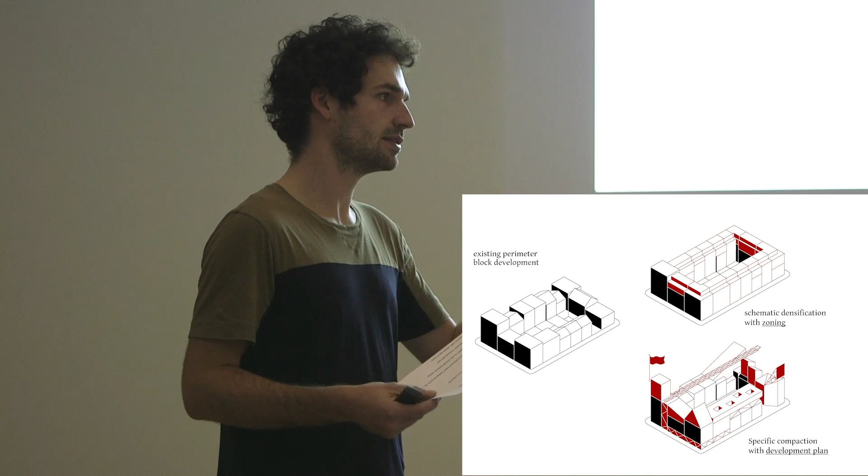So one way to change that is just to build more apartments. So to re-densify the city, or to densify, because Basel is more or less built. We have these industrial areas which are coming, which are also shown at the Dichtelust exhibition, Lysbüchel, Klybeck, Dreispitz. But in like 15, 20 years, when they all will be transformed, and there will be apartments and offices, then what rests is this quite heterogeneous structure in Basel of the Gründerzeit and also later on. And there at the moment what we do is zoning up.

So nowadays this would be, for example, a zone 4, so you can build 4 floors, and then the political way is to say this becomes zone 5, so all the owners can build 1 more floor. But my position is that, first, it won't be like this, because there are different owners and maybe one will do it and the other not.

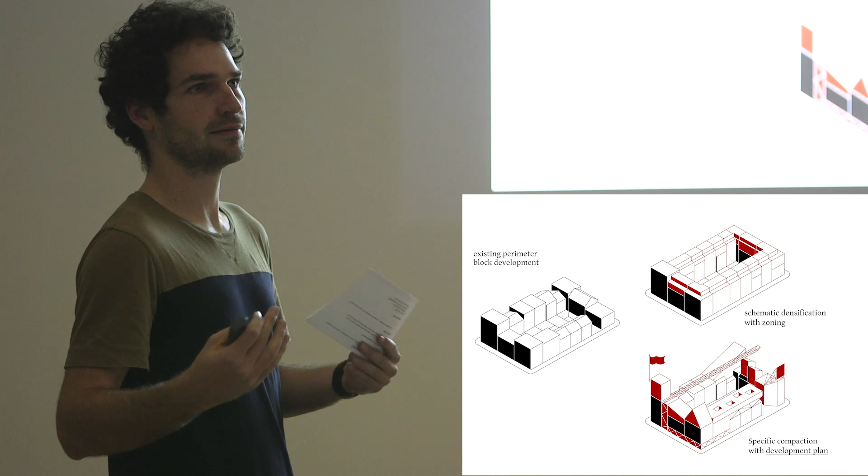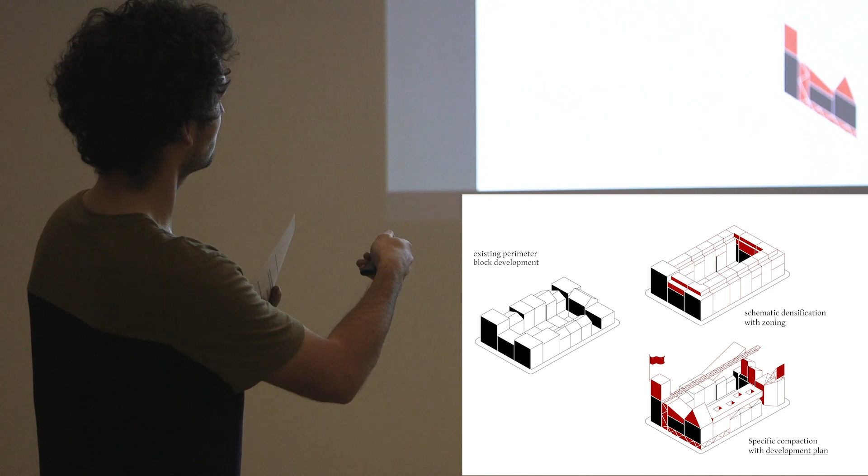And the other thing is that it does not really help the public space. So it does not bring quality. It's just densifying, more volume and more apartments, but no one cares about the quality of, especially, the courtyard. We will talk about this later in my project. Maybe the street part, yes, and also the program. It's about the quality of space, but also of the program.

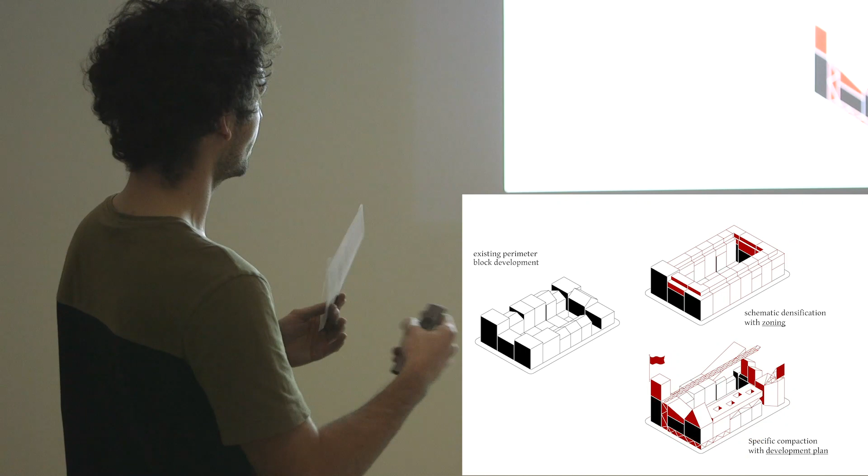And my thesis was to say we need, for this case, specific development plans, Bebauungspläne, where we can also have a higher density if we want, if it makes sense, and where we really can find specific solutions, specific compaction.

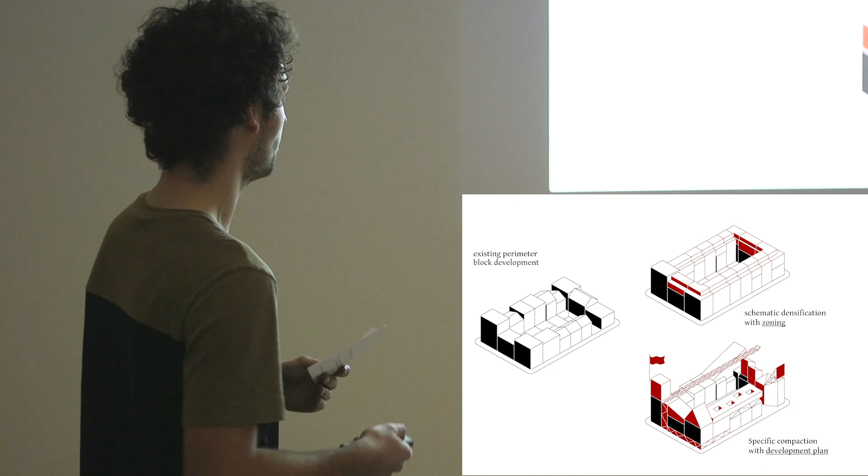Then the other thing I found out, or where I think it's an important point to think about, is the question of affordable housing, affordable apartments. And nowadays, I think it's not really possible anymore to build affordable houses in Switzerland, or it's very, very hard. It starts with the prices for the land, which are also increasing extremely.

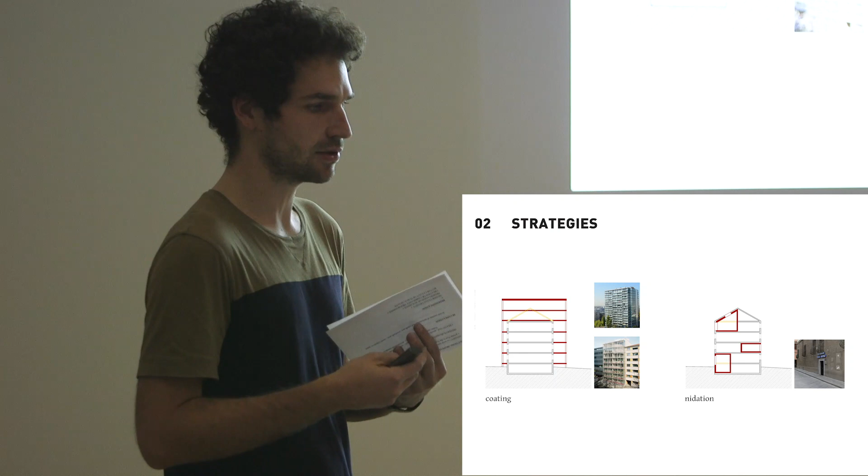So it's much easier to keep, let's say, develop in a more sensitive way the existing affordable apartments. That's much easier. So we really should care about this. And there are different strategies. We know this from Lacaton Vassal, this coating.

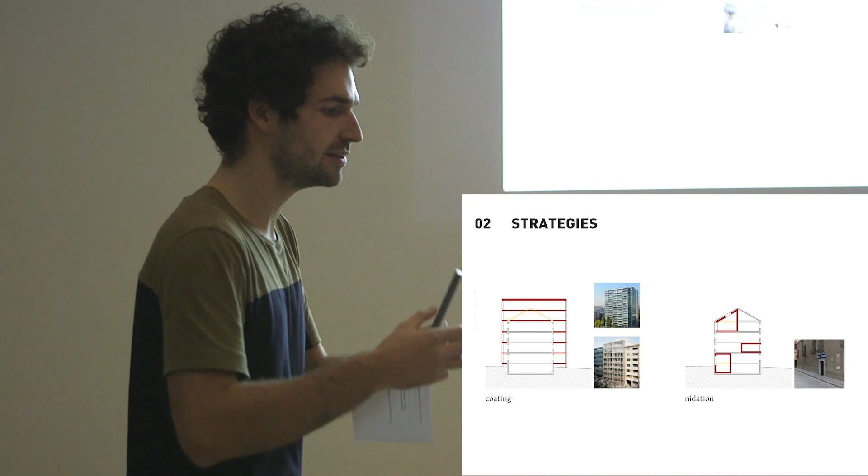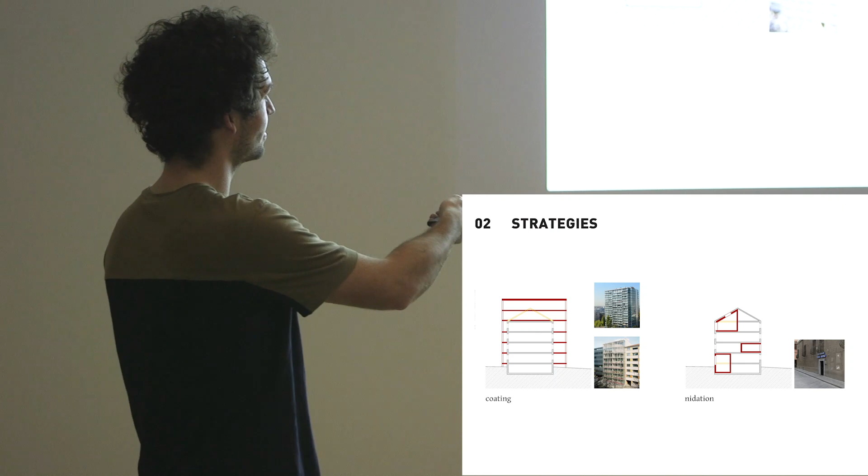So just taking an existing structure and, with very simple construction, maybe also with new floors on top, bringing there more surface. Then a more special situation is this nidation, where you use an existing house or structure and put inside a new program or a new space. This example is from Florence, from Firenze. It's an old Renaissance palazzo, and in the base you have this tiny restaurant in this impressive palazzo.

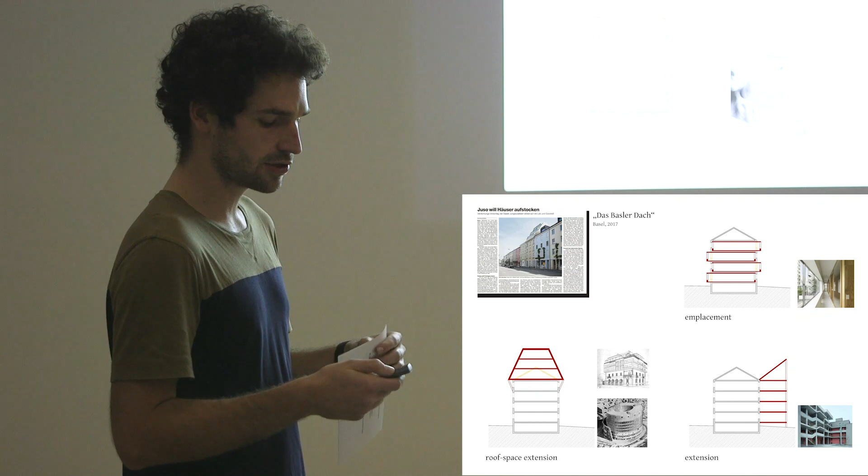Then the emplacement, so taking an existing structure, for example an industrial structure, and bringing in new boxes. This is from Tokyo, a shared house in an old garage actually, where they just put wooden boxes, and it became a share house for students or young people. So a very simple strategy: using a structure just as a shelf and putting in new uses and spaces.

And the other is also a very classic strategy, just the extension, which is much easier, since the structural impact of a roof space extension is much bigger, and in Basel we have the problem of earthquake danger. So this can also be a simple and easy strategy. This is the Kraftwerk in Zurich, where they did an extension of a building of the 60s with very interesting cluster apartments, quite innovative.

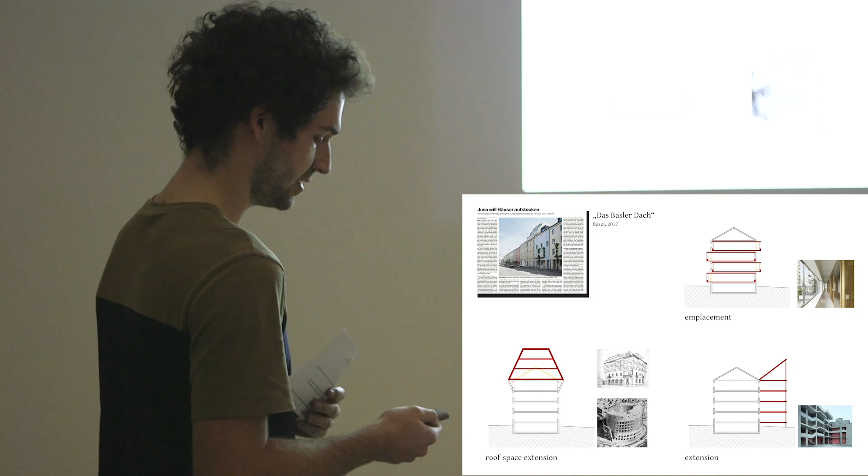So we come to this area I chose for my study. I really had a variety of different plots in Basel which I thought were interesting. I was at the city model and really just checked all the blocks and thought which could be interesting. And in the end, I chose this one.

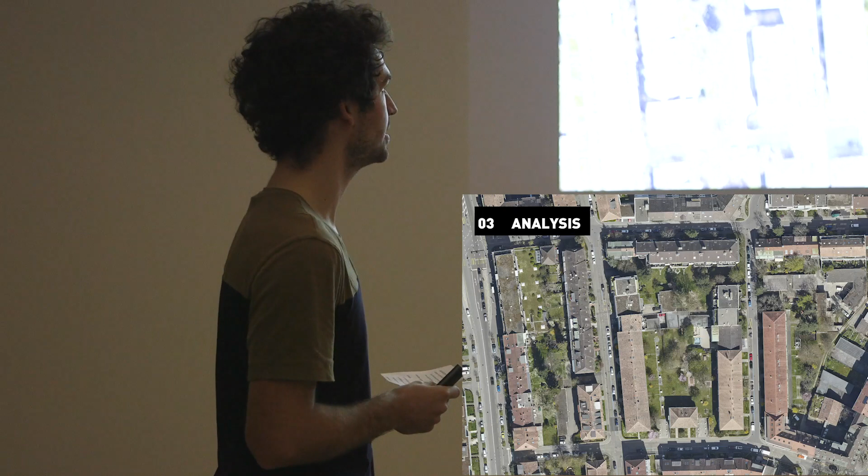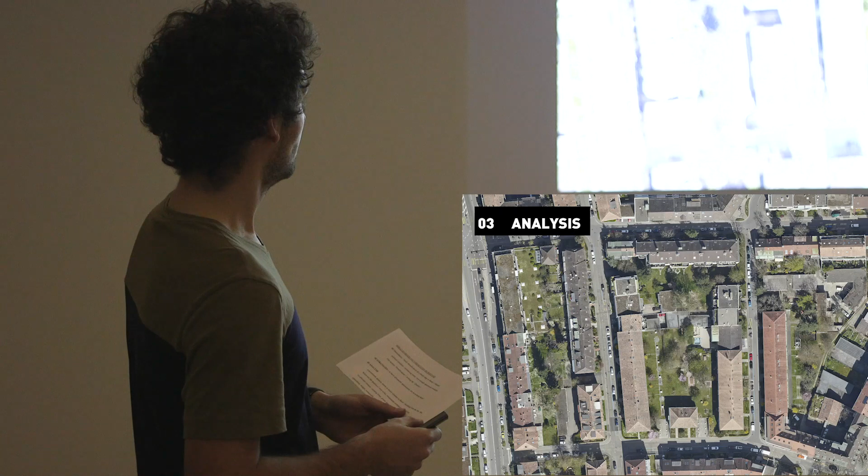It's in the Iselin Quartier. So north of it is the Felix Platter Spital, and it's an area where most of the buildings were built after World War II, in the 40s or 50s. So there are actually no historic buildings, and it's more or less built between the 40s and the 70s.

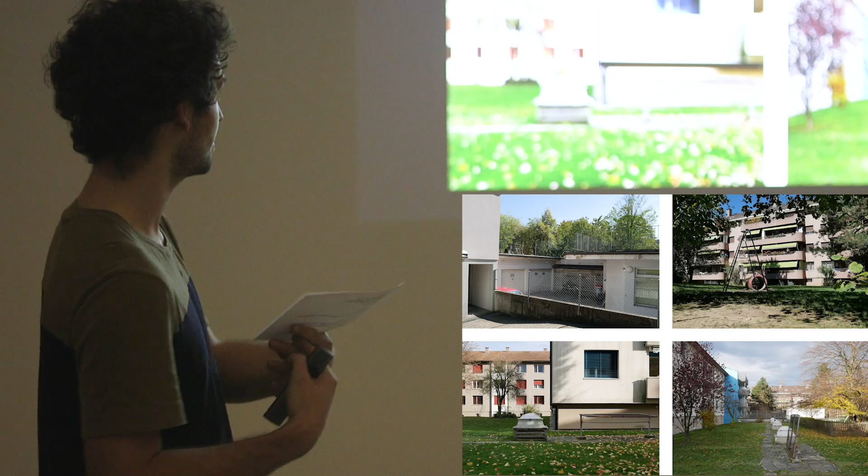It's very solid. And as you see here, there is no street life. The public spaces are more or less dead. But there are qualities, and my first approach was really to find the qualities in this. And there are a lot of qualities: the architecture, which is very solid, and also the trees, the green spaces. But the program does not really fit to the space, and I think it's also not dense enough to have more public life or more activities in the ground floor, for example. But I found quite soon that there is a lot of potential.

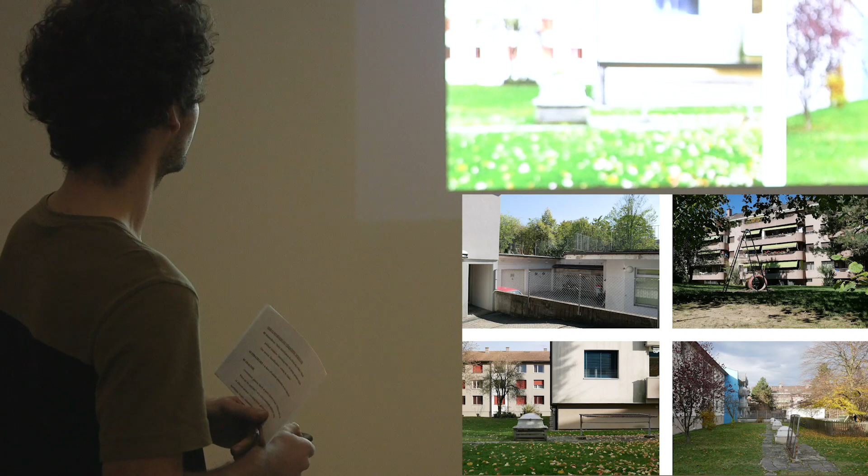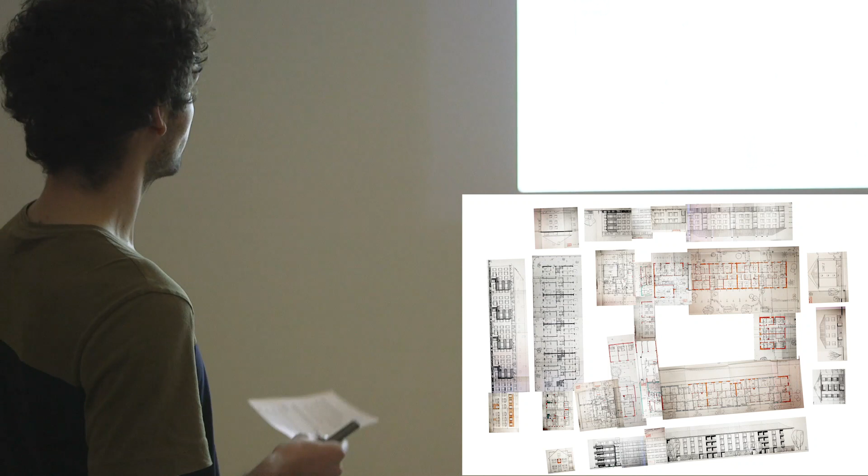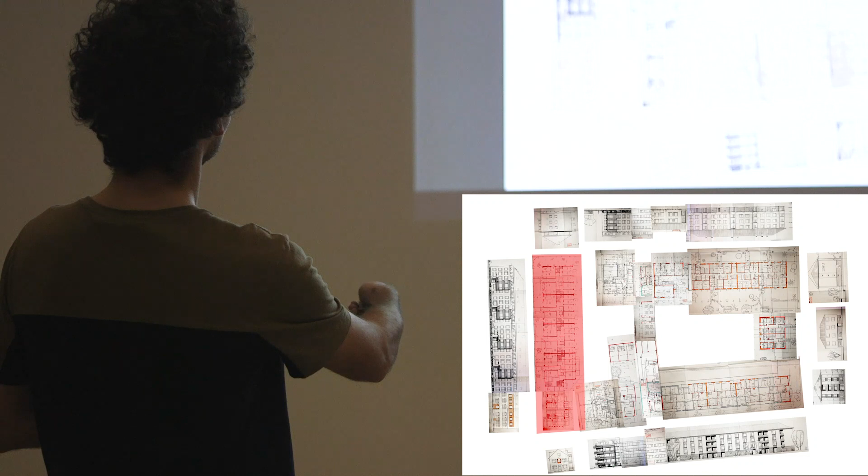And then I checked all the plans from the city archive and brought them all together of all these houses. So this part here is built in the 50s. Half of it is built in the 50s. It's more or less the same typology. And then here we have one block from the 60s, which was the development of this part.

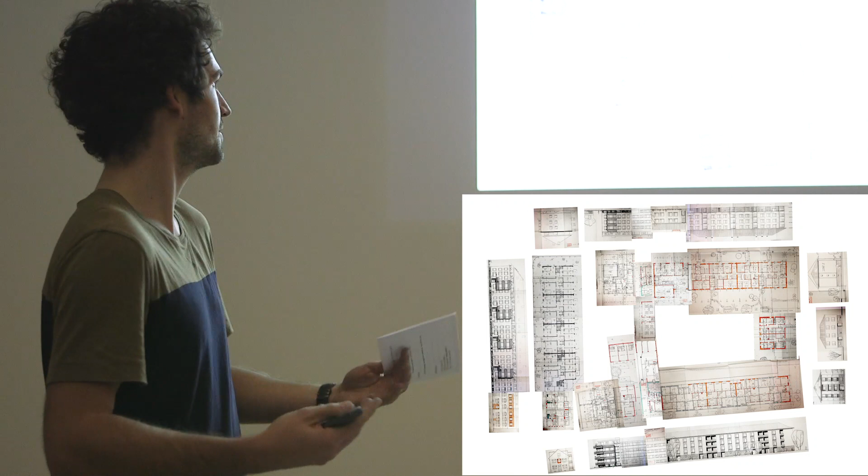And here I also found that the construction, and I think there we are lucky in Switzerland, is very solid and very sustainable. The 50s buildings are massive construction, which still work very well today after 70 years. So it's good quality.

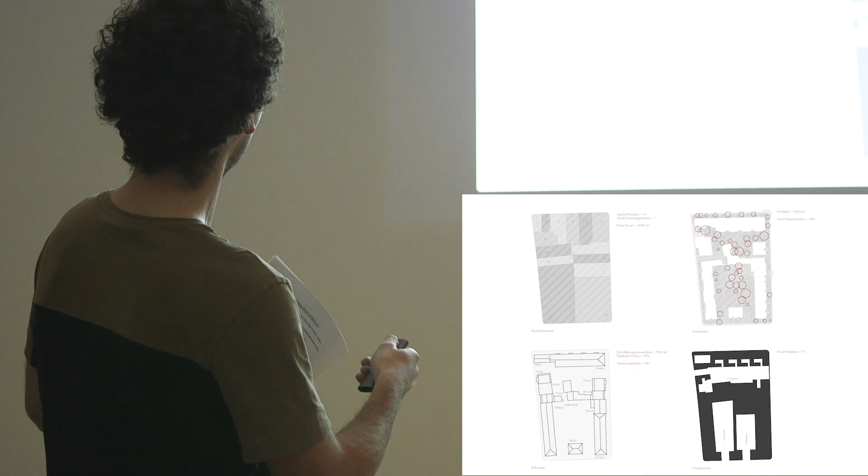Next, a short analysis about the public spaces, the trees, and the ownership. I think this is also a big question. We're talking here about 14 different plots with, I think, 8 different owners. So this is a big issue if we would come to the reality of a realization: how to deal with this. We have 8 different owners. How can we bring them to the point to develop it?

The other analysis I did was on the level of the existing apartments. This is more or less the catalog of all the apartments existing in this block. Here I tried to find the good points and the bad points of each apartment type. In general, these apartments are quite simple, but quite sustainable, with good proportions, quite efficient. One big problem is that, with one or two exceptions, there are no elevators. So for handicapped people, for elderly people, this is a big problem.

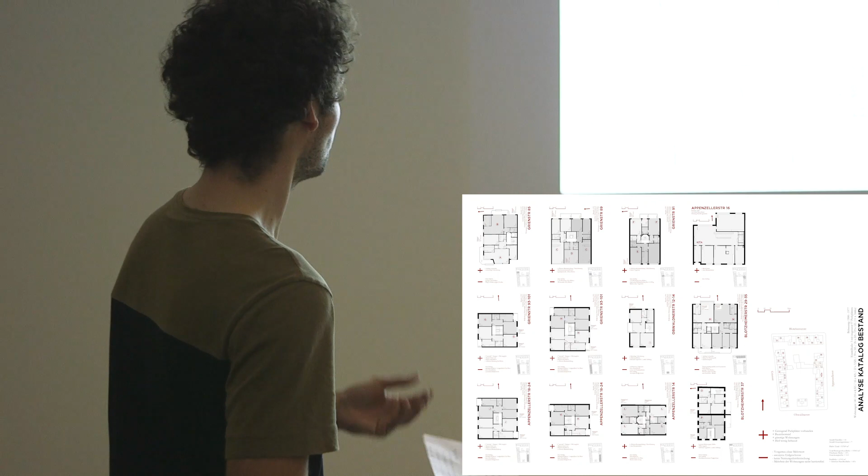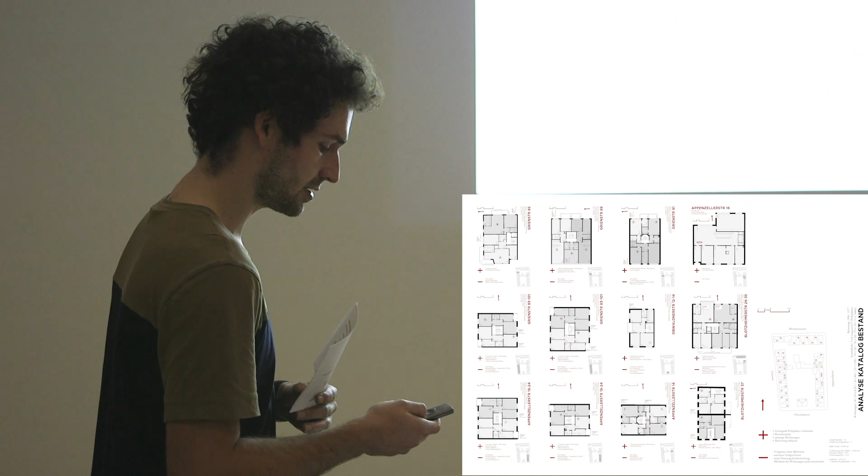And the other part is the balconies. There's not enough. I think today we like to have bigger balconies; these are very small and very functional. So these were the two points that I criticized. But in general, I think these apartments work fine. They're quite generic, but they work. So there's really a quality in this.

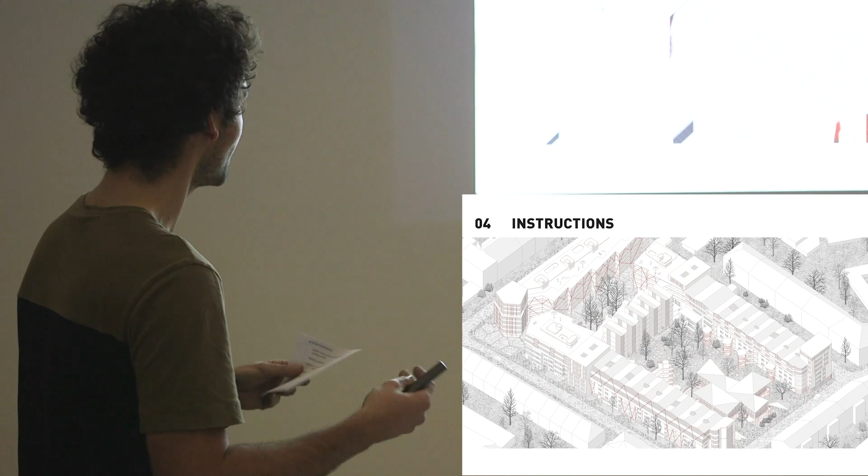And then I started to do my project, and now I'm coming to the instructions which I took out of my project in the end. The first part is the ground floor, the density. We shouldn't only talk about the density of volumes or surface. It's much more important first to talk about the density of activities, of programs.

So I tried not to bring too much there, because it's still the Iselin Quartier, so there will never be a lot of street life in the next 10, 20 years, but at least some at the corners, for example a little bar. And here I did a spa, and on top there's badminton, because in Basel we actually don't really have a public place where you can play badminton, at least in winter.

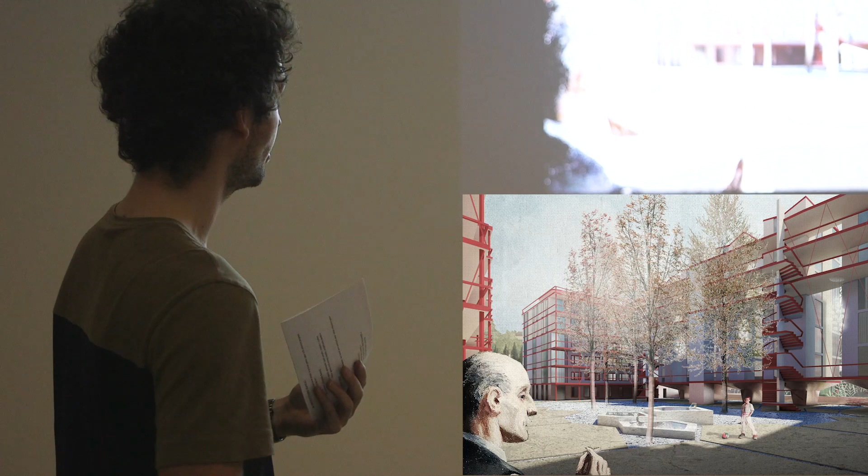So to add a few programs, and then also to try to find strong images or strong ideas of the public spaces in the courtyard, because today the courtyard is more or less private, or it's really separated into different private parts.

And I wanted to have some kind of transparency, and also to say, for example, that this part here in the north really becomes a more or less public square. Of course, there are some filters that make it maybe a bit more private, but to treat them as public spaces for all the people in the neighborhood, and not only for the ones who live there.

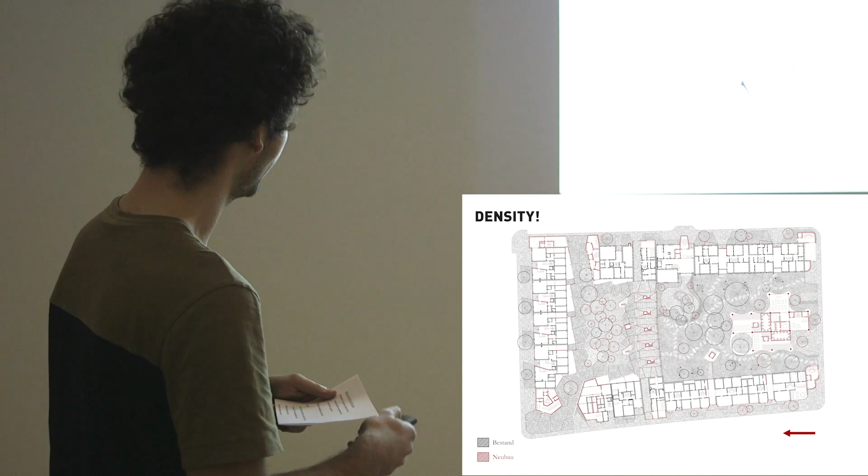So this is one image, and then preserve is the second instruction. I would say really try to preserve as many structures or apartments as possible. Because, as I said, they work, and it's also about the ecological point of materials that were brought there, and the whole question of gray energy. So I just added a few points here and here.

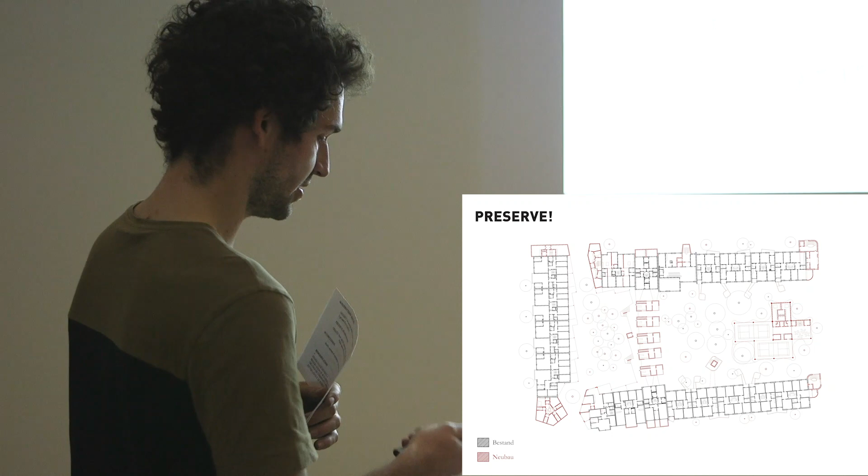I added new elevators and staircases to have a connection to the new floors, and decided on strategic points here and here, because in this building the typology was really not so good. At 2 points, I decided to demolish the buildings and find new programs and also new volumes. But in general, 90% of the existing was preserved in my project.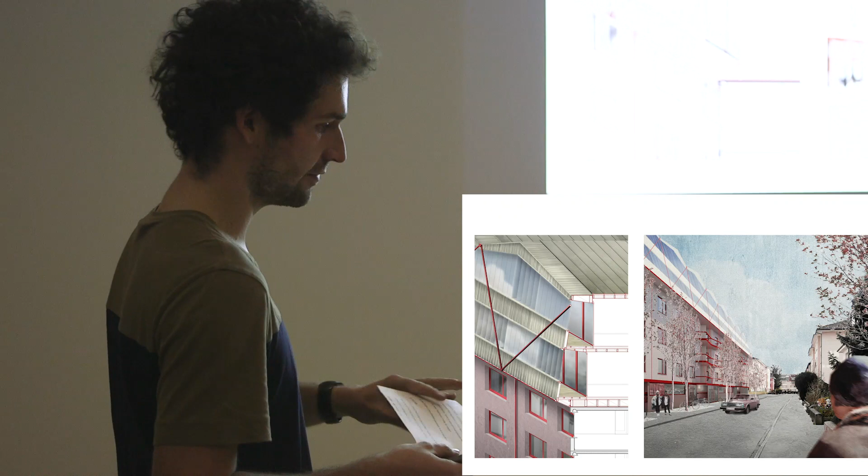Here also in construction, as I said before, the wooden construction for an elevation, which works quite nice, and this is actually the plan of the roof floor. There I brought new apartments. So this is the part where the densification happens, and there I really cared about the typologies. The existing apartments are more or less generic 3-4 room apartments. And here I thought about more specific apartments which do not exist today in this area.

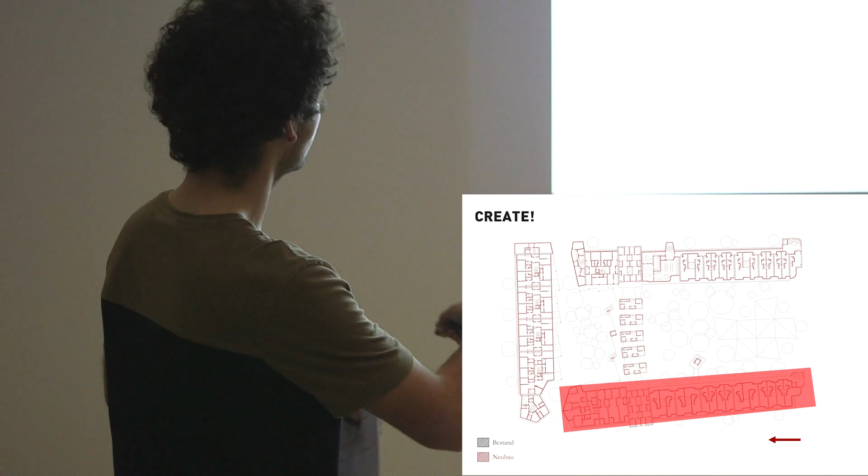So mostly there are quite small apartments for one-person households, for students. Here are the student studios, and then also for elderly people. And all these new apartments have a connection with an elevator, so they are accessible for handicapped people. And that's also the demographic development in Switzerland. I think it's a big issue we have to care about.

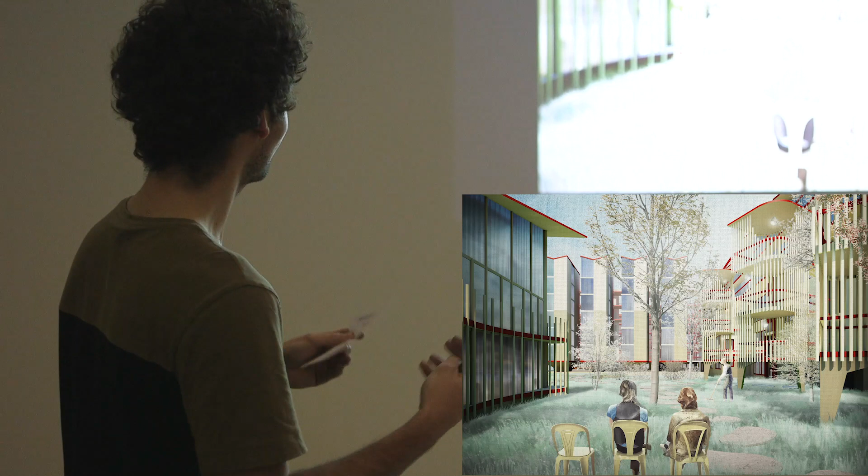And when we preserve the existing apartments, which on that point are not strong, I think even more we should care about this in the new apartments we do. So also create strong spaces which have a strong identity. So really try to find a narrative of public space and the strong spatial, but also about the materials, these wooden balconies which are standing in the garden.

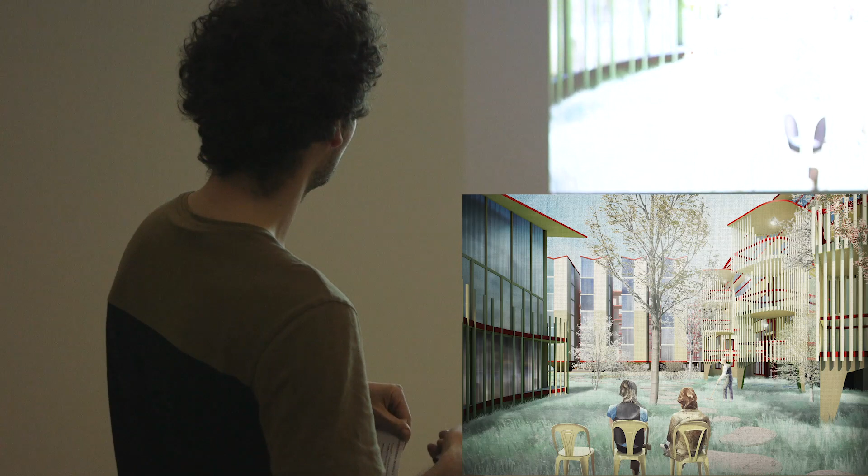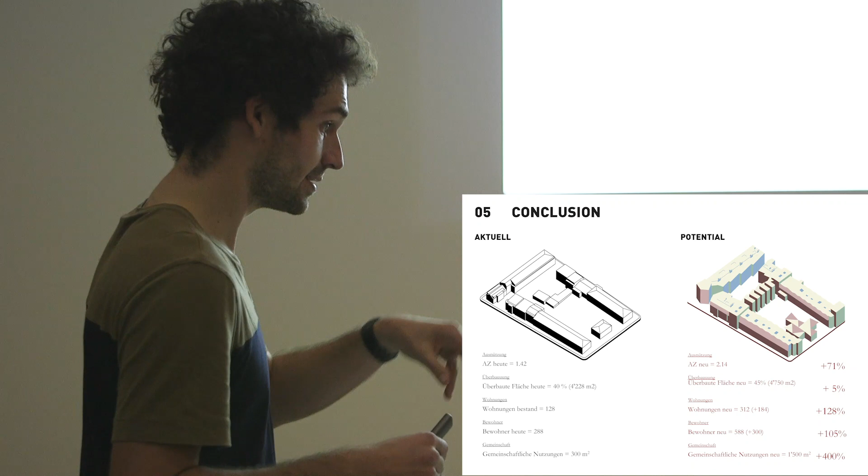So I said the part more south is the garden, and the other part is the courtyard, as in this typology of the hôtel entre cour et jardin. So this is really the garden with these tree houses. That's also part of this creation of strong spaces, which I think is really important when we talk about densifying existing structures.

This is more the technical, just to show the potential of this plot. There are more than double the number of apartments, but I have to say they are more or less small apartments, but still there are a lot more apartments. It's quite a high densification. What was also really important for me is the built surface. So not to increase the built surface,

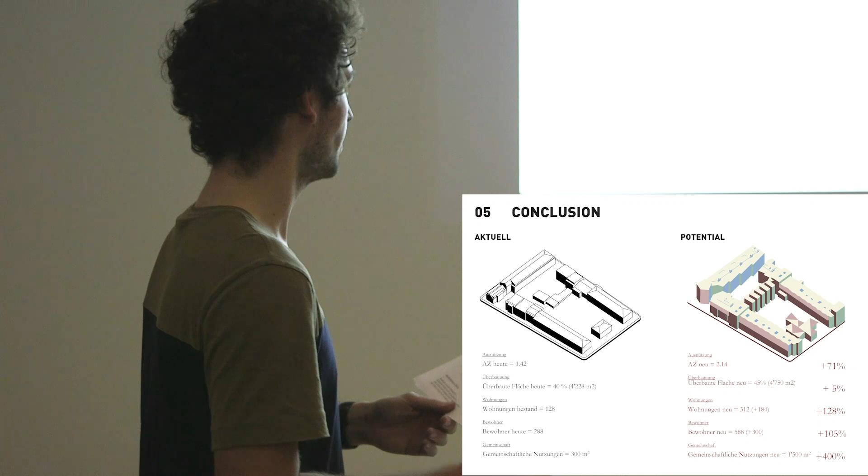which also helps to preserve the trees, for example. I think existing trees are a great quality. It's also very important for the climate. So we always should try, if possible, to preserve the existing trees, because to have a tree of that size, it takes 50 years. So this is only 5% more built surface, with 70% more building surface. And also the public or collective surface, which I try to increase.

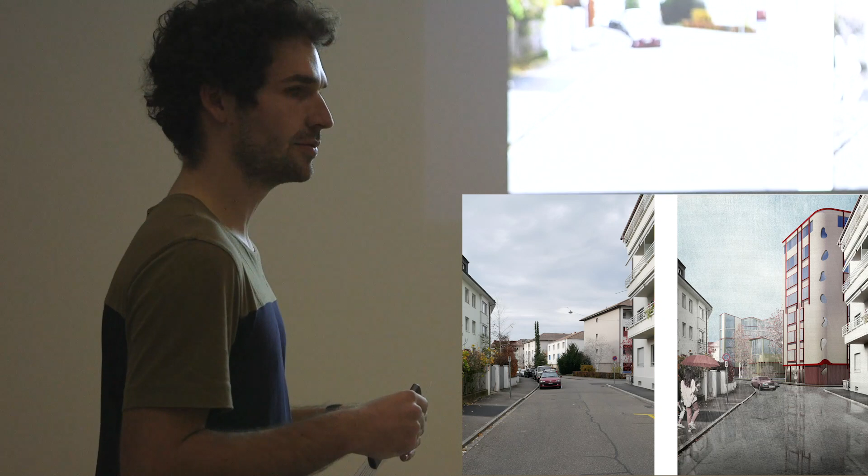So let's finish with the conclusion. On the left side is the existing, and on the right side is my project, which I think shows quite well from this angle that there is much more density, but also an idea of a narrative of the city, even if in this academic approach it's maybe a bit artificial.

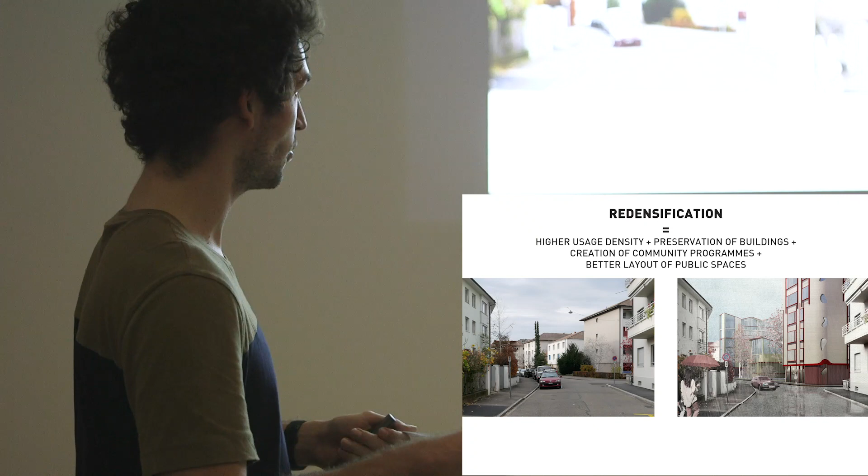So how I define redensification, in my opinion, is higher usage density. It's not just about higher density of surface, the usage is really important. So how many people live there, how many collective or commercial spaces do we have? That's the important point about density. Then, if possible, always try to preserve the buildings.

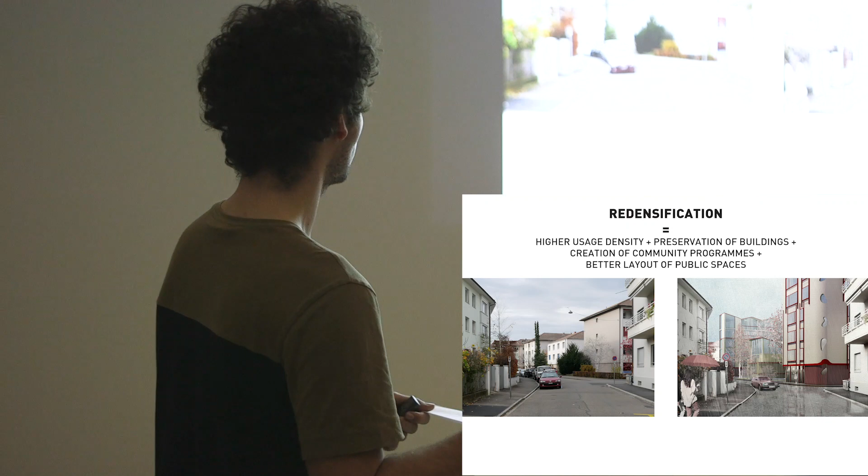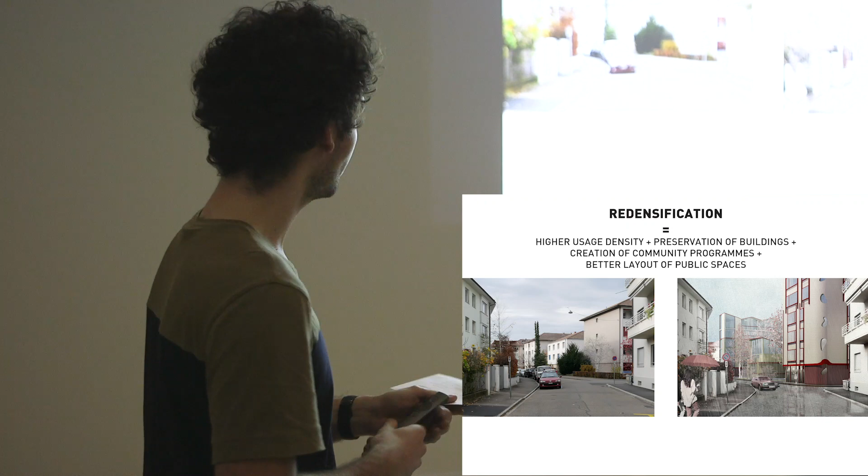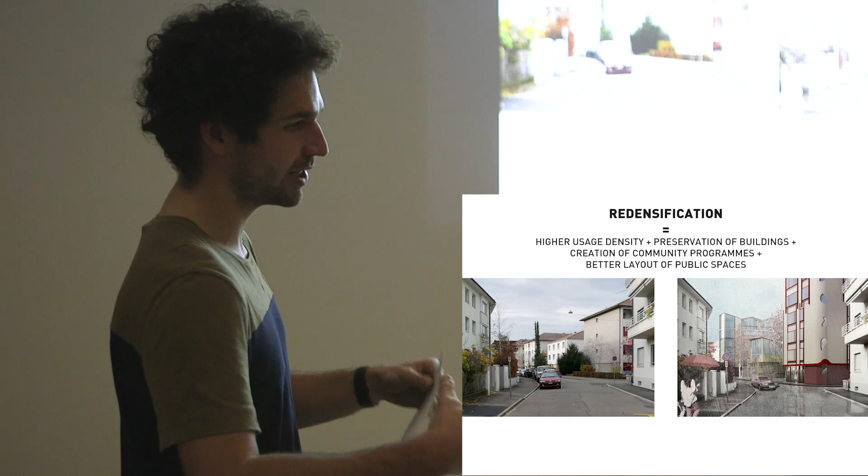Third, creation of community programs, so that there are also programs for the community. It can be a library or a sports hall. And then the better layout of public spaces. In this study, it's the courtyard. The courtyard, as I know it in Basel, is often a public space without a very high quality. So it's very important to find ways, even with 10 or 12 different owners, to create public space with a good layout that allows a higher usage density.

That's the end. Thank you.

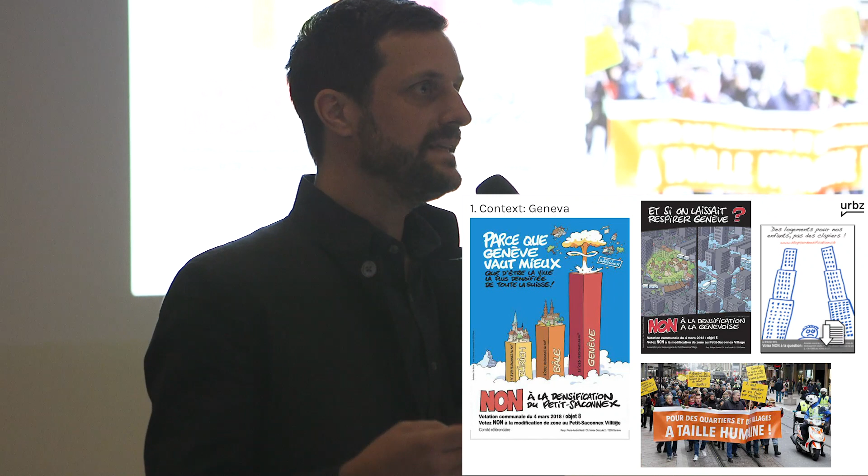So now the project. First of all, the context in Geneva, as in Basel, is one in which densification is both a need and also a huge struggle for the authorities and also for the inhabitants. These are all posters against densification, so there's a lot of debate, a lot of reaction against densification, which people feel is really affecting the quality of life. In this poster, I don't know if the data is accurate, but they say that Geneva is densifying much more than even Basel and Zurich.

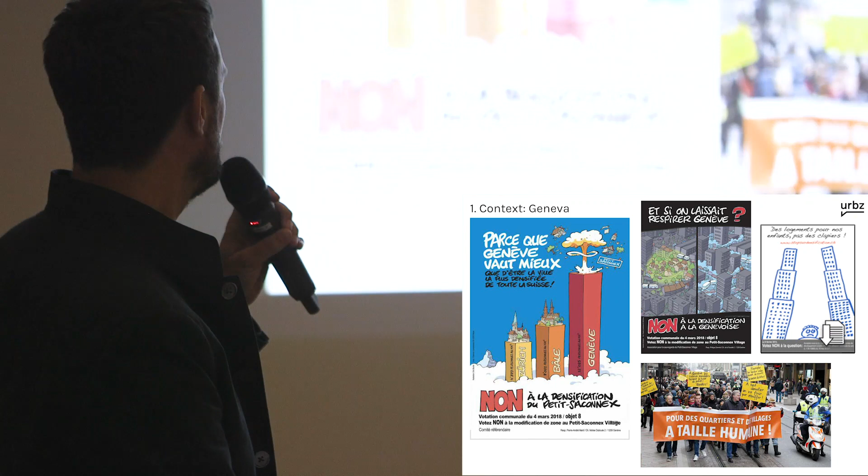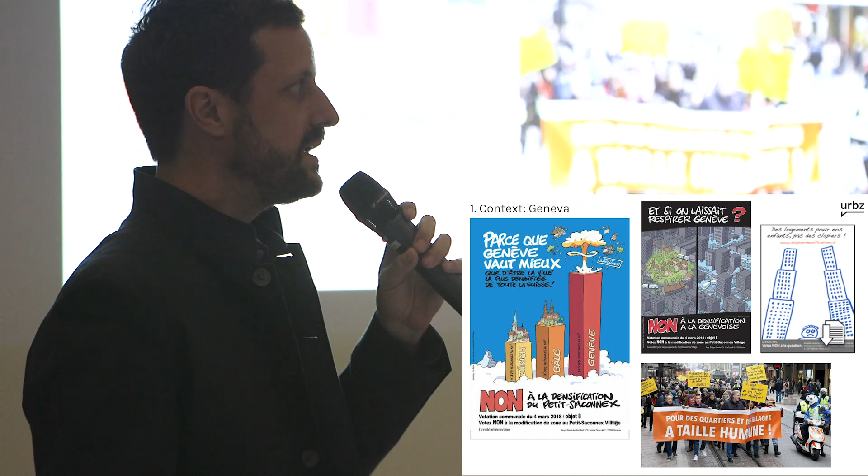So there is a strong sense of resistance against most of the urban plans which are happening now. At the same time, in Geneva in particular, and I think it's the same in Basel City, we have no more space that can be used. We have a restriction now on all the agricultural plots which are left. We basically have to densify in order to create more housing. And there's a huge housing shortage.

The specific context of Versoix: it's a municipality very close to the canton de Vaud, at the edge of Geneva, which was at some point a village and which has, since the 60s, become more of a dormitory town. Of course, people in Versoix don't like to be called a dormitory town. They feel strongly about the history of their neighborhood, and they want to create another identity for Versoix. It's also very close to the lake and very close to the forest and the fields. So in terms of the natural environment, it's quite a beautiful part of the city.

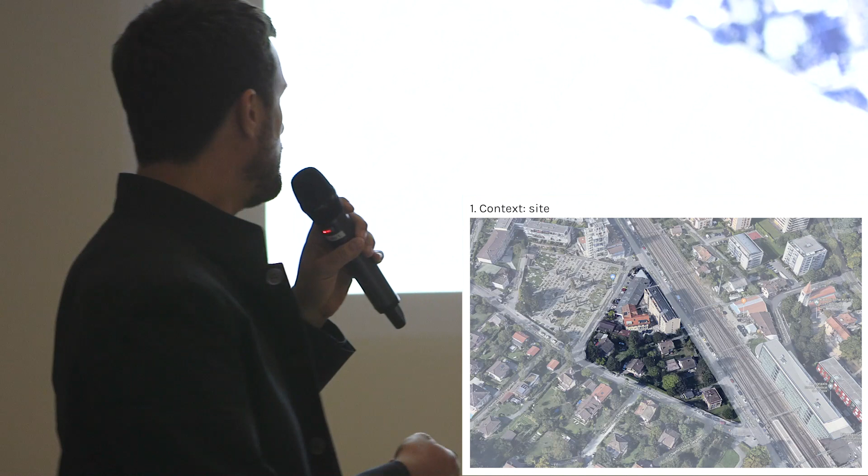The specific context of our site is this. It's a triangle, about 800 square meters. First of all, it's a place where people are already living and working. So it's an active place. It's not an industrial plot that we can just reconvert. It's a place where we have to work with inhabitants. And part of it needs to remain.

For example, the big building over here is not something that can be redeveloped at all. So you see it over there. And there's also a garage, which is very active, and which is not going to be redeveloped. So this will be a bit the usage. Also, there's a cemetery on one side over here, and the garage over there, and then it's surrounded by villas, such as this one over here, and inside it's mostly gardens.

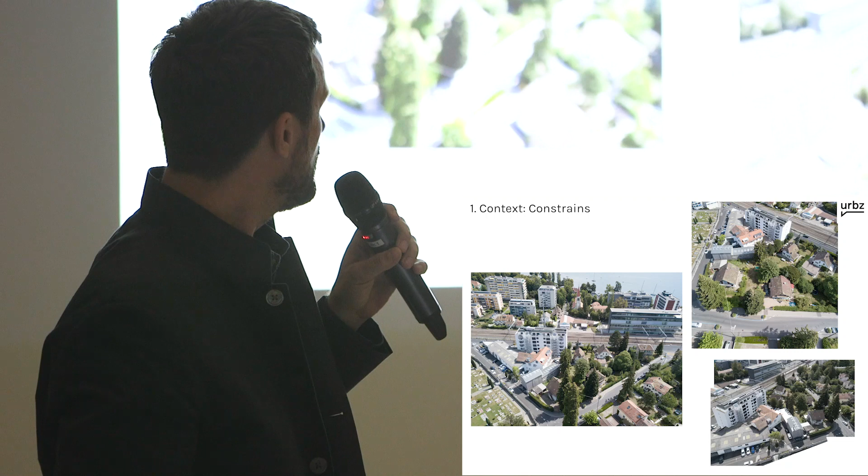And also the main difficulty we're facing is that on one side there's railway tracks, so it's very constraining in terms of regulations. On the other side, of course, we have the cemetery, and we have a fabric which is mostly of small villas around, and people don't want to see big buildings coming in front of their villas.

This is a plan that was proposed, not just proposed, but almost imposed in 2013, in which there would be a very strong densification, 2.3 FAR, and with buildings, towers going 10-story, with a big bar of building over here, a big rectangle, which connects to this one.

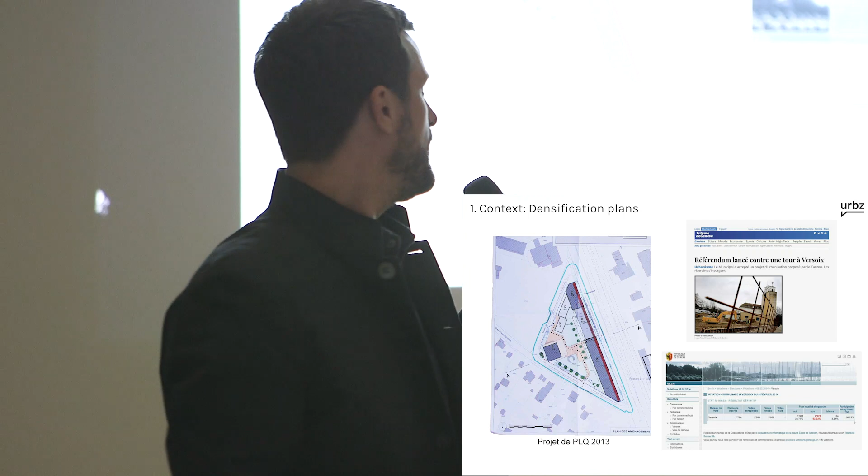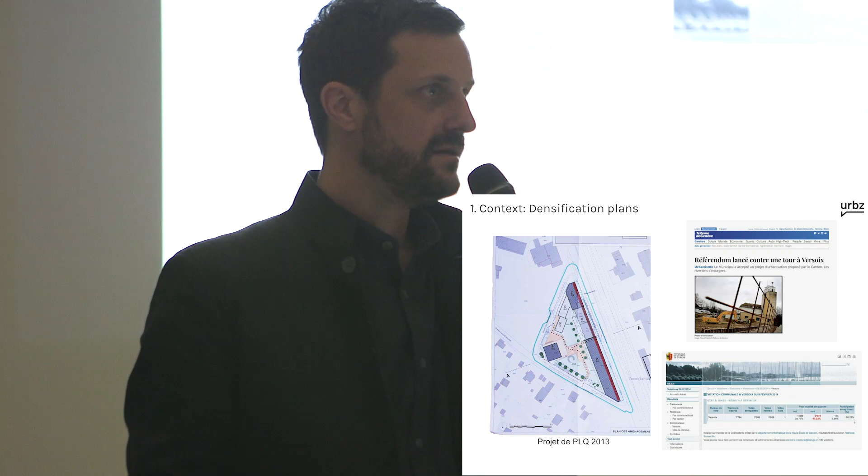This created a very strong reaction, and people have signed a petition, and it became a referendum, and 63% of the inhabitants of the municipality voted against the project. Although the state could have gone ahead with the plan, they decided to leave it and to abandon it. So this was 2013, 2014.

And so we were asked to come to produce a participatory process and the plan. And of course, we had to come up with a totally different approach, one that would not be top down, because the other thing that people were really kind of angry about is not just the typology and the massive kind of densification that would happen in their neighborhood. It was also the fact that there seemed to be no participation, no involvement of the inhabitants in the process.

So we decided to produce an approach which would be a qualitative approach to densification, meaning that we didn't start with an objective of densifying up to a certain number. We also decided to produce not an urban plan, but a neighborhood project, and that the urbanism would be driven by the process.

And finally, and this is something that is common to all our projects, although we are in the dialogue, in the discussion, we try to avoid consensus building. It's not something that we seek at first. What we seek is cooperation.

We seek strong ideas. We want people to be able to express themselves, which is something which is sometimes difficult to do in the Swiss context, not just in the Swiss context, but here, of course, it's very strong because we tend to want to agree, and there's a strong anxiety towards conflict. So how to really stimulate people to speak strongly, to say what they really feel. This is what we try to do.

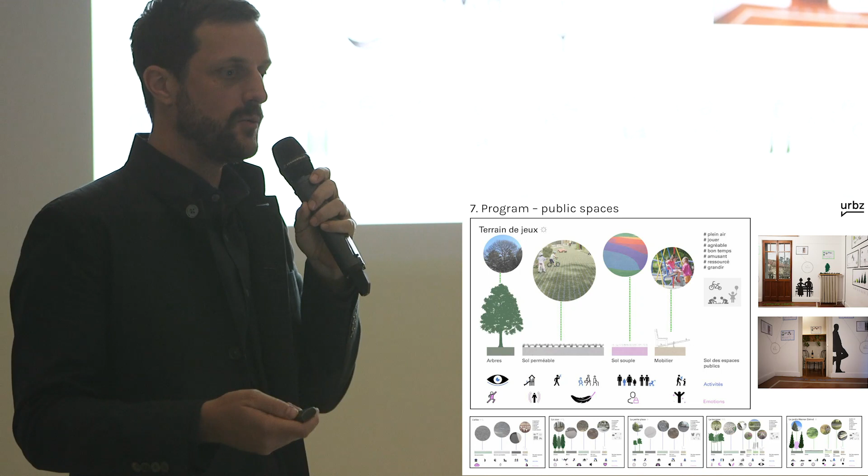And then we presented a program, about 6 months after the start of the project, a program without specifically showing where things should be located. So, okay, this is the program, this is the story we want to tell. Again, we had the opportunity of showing it in the house. So this was also something that we could stage and show and try to provide a feeling for how things could be. I'll explain the program in more detail when we see the plan because it becomes easier for you to understand. A program for the public spaces, but also for the buildings.

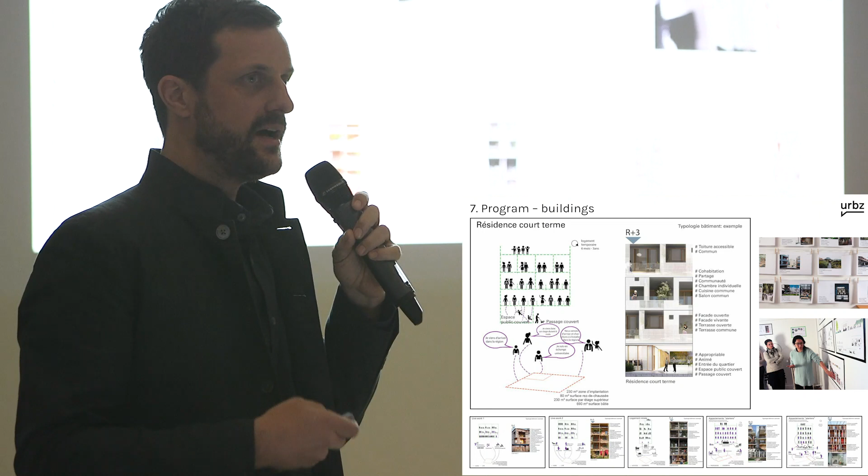Again, this program was constantly challenged and we were in constant interaction with the visitors of the house, and it was shaped by those discussions. And that's something that is very particular to this project, that the form really followed the process. The form followed the program, which seems obvious, but it's not really the way things are done, at least in Geneva usually. Form follows process, a concept that also created some strong reactions.

Some people said it was very irresponsible to say this, that in fact the form should free itself from the process. We really thought that it was important in this case, if the project was to be accepted by the population, to ensure that the process is recognized in the form.

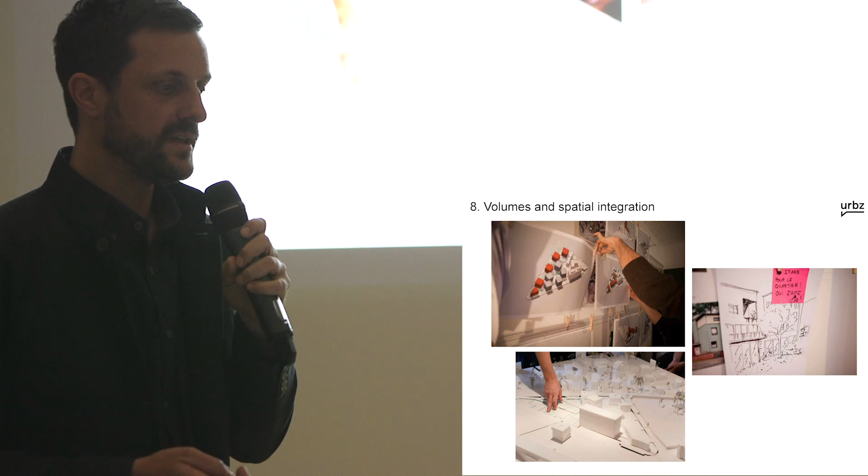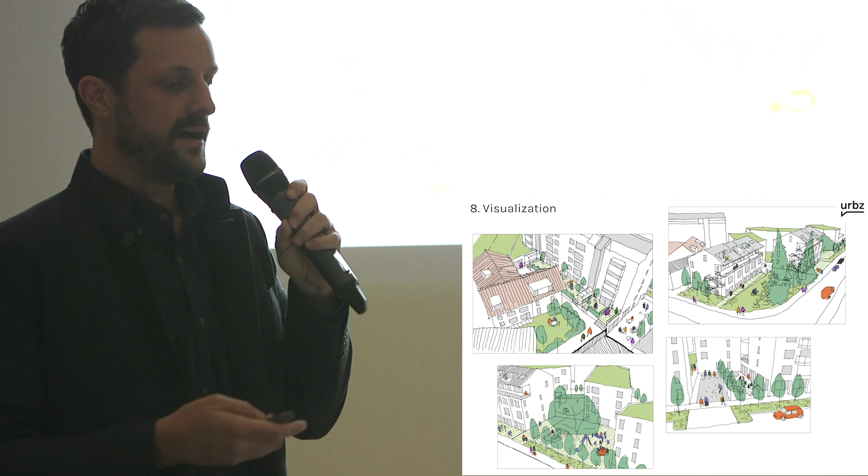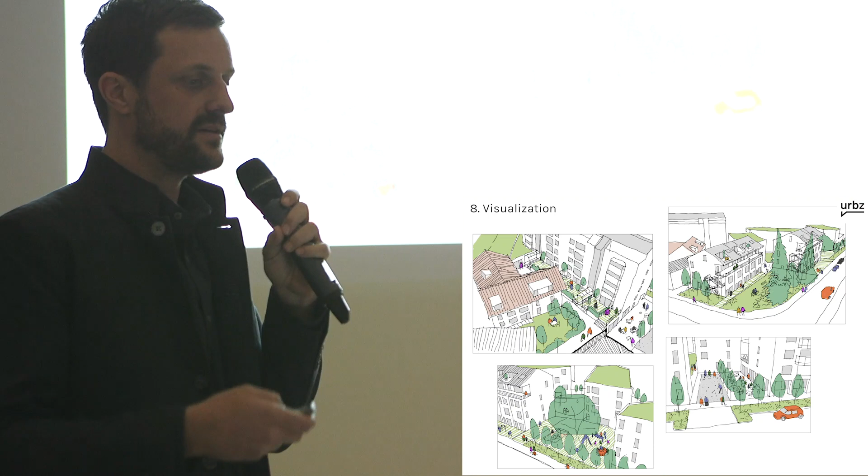So this was an early visualization of the project, in which we already see the program. The program was one of many small public spaces, open spaces, and relatively low-rise buildings, maximum ground plus 4, and also a few places which were live-work, with activity in every single building. This, fortunately, was a constraint from the beginning. On this site, we could only do mixed use because of regulations imposed on the site due to the noise from the planes and the trains.

And then slowly, we went into formalizing the project. And even in the formalization there was a lot of back and forth. We took the initiative of doing a financial plan as we were drawing the neighborhood to make sure it was feasible. Feasibility was always something we paid a lot of attention to, because we really wanted to avoid creating a project that would be a list of wishes that could not be feasible. So we always checked, went back and forth, and we had to deal with extreme constraints.

And all that was embedded. We also did, of course, all the sunlight studies, and that became something that we could explain all the time, because we found that since we developed a relationship of trust, people were quite willing to understand and to reason on why things could not be done a certain way, why things had to be done one way rather than another.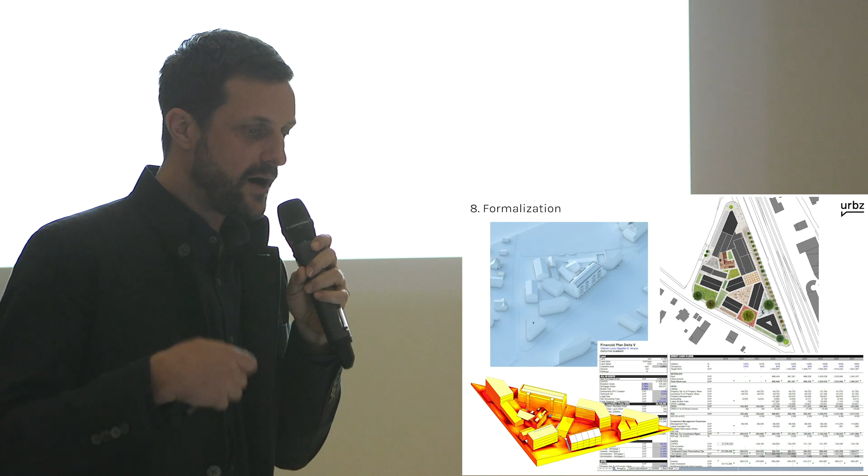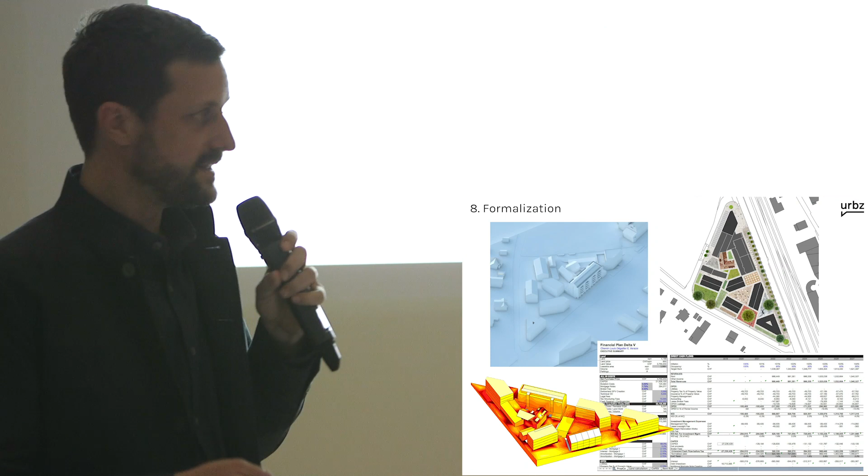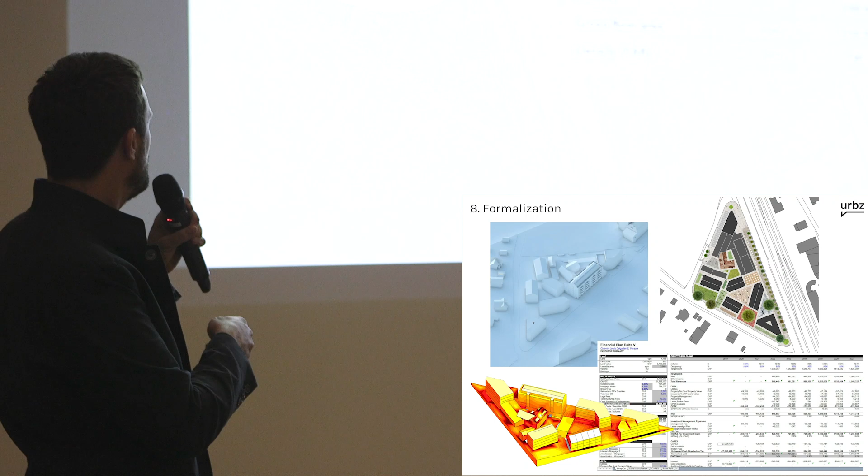So in the end, this is the plan, and we basically went from a density of 0.7 to something close to 1.8, which was far more than the minimum, and which also creates about 3,000 square meters of public spaces in a place which is quite dense. Here on the plan, those areas had to be retained, this building is elevated, and those are the new buildings. So about five new buildings.

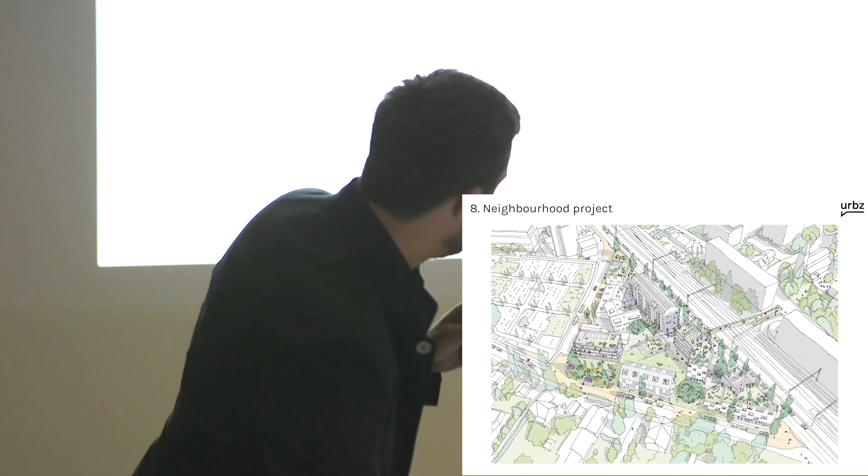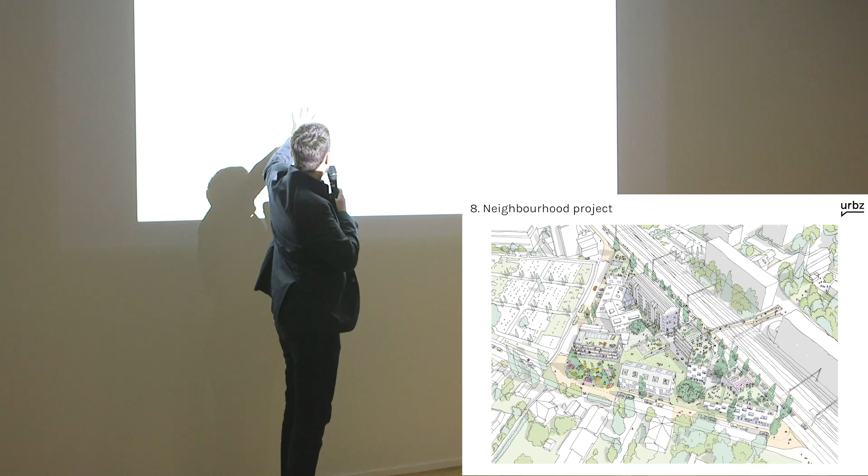I'll explain the neighborhood project directly on the screen, through this image. First of all, we wanted a garden here that would connect to the villas. We know a lot of the house owners have gardens; there's a strong gardening culture in this neighborhood. So we wanted a quiet, nice entry to the neighborhood from the villa side.

Here's a plan for a cooperative with, at ground level, a large common space which goes all the way here. We use the 4-meter slope on the site to create a 500 square meter common space with a common kitchen at the center of the neighborhood. And we create here a place which is not enormous. We try to keep those public spaces open and intimate rather than very large and impersonal.

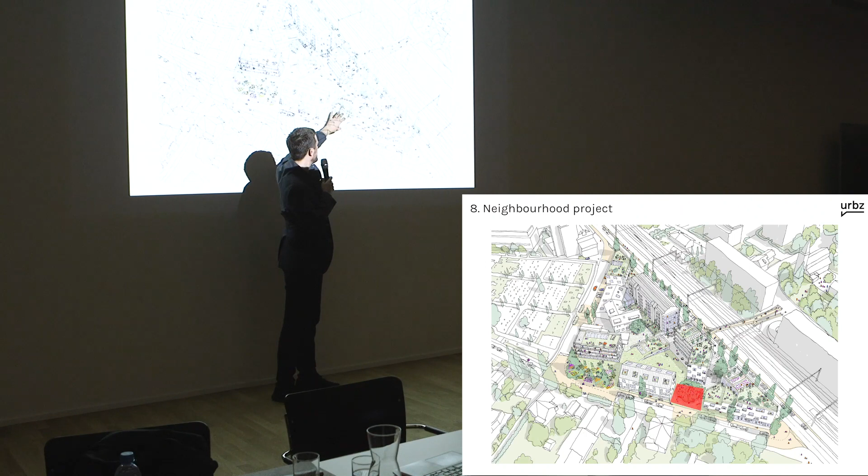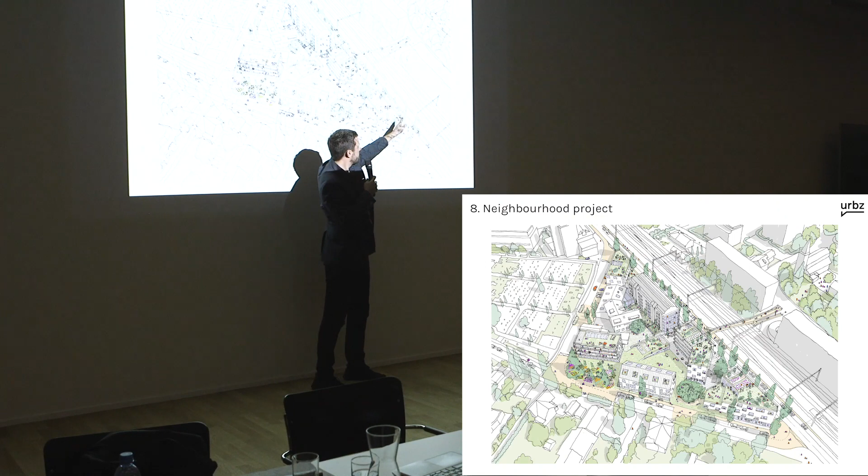Here we have a playground connected to the school, again a strong demand from many residents with children. Here a place more for teenagers. On this front, the main constraint is the railway: because of the risk, which exists across the entire country, associated with the transport of chlorine and explosion, all these buildings cannot have windows which can open.

The windows cannot open. This is a constraint we had to explain over and over again, and people understood. And so here we created a more urban front, with a place mostly dedicated to teenagers, which is a skatable public space.

So it's not a skate park, but it's a place with furniture that can be skated, and which can also be noisy because all these buildings cannot open the windows. So it's in fact protected from the nuisance of the train, and so we can create a bit more nuisance over here also.

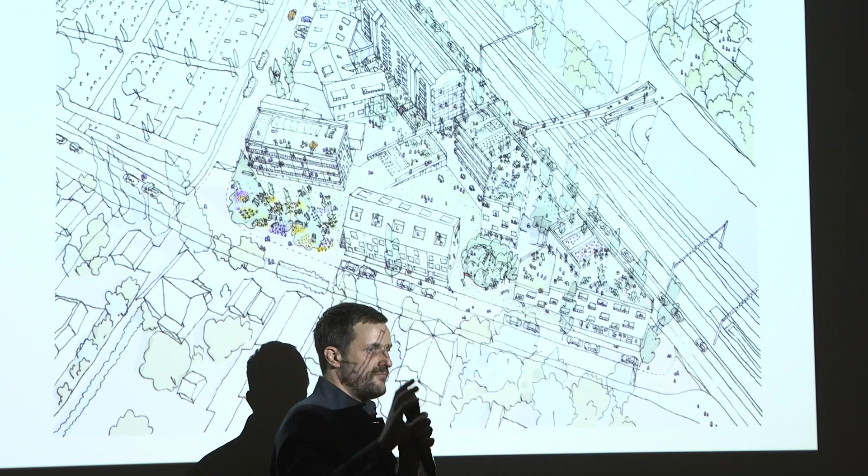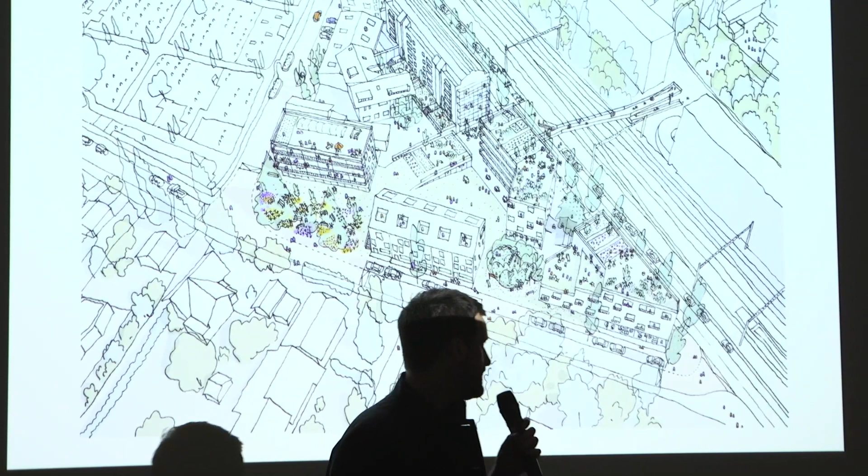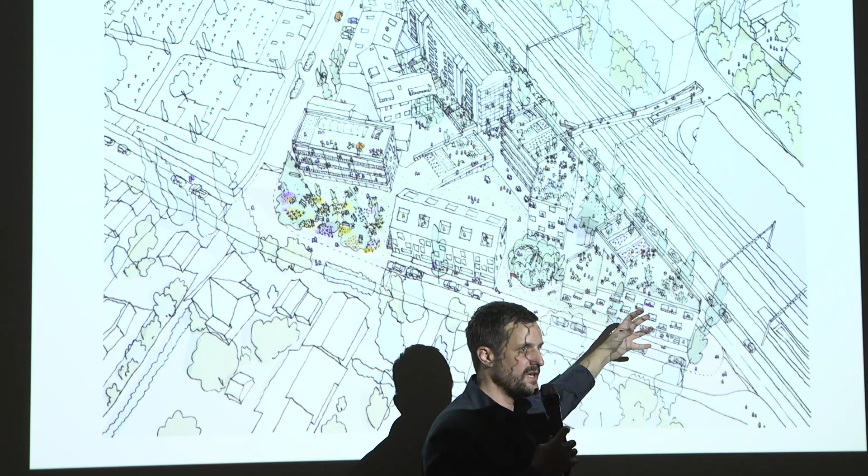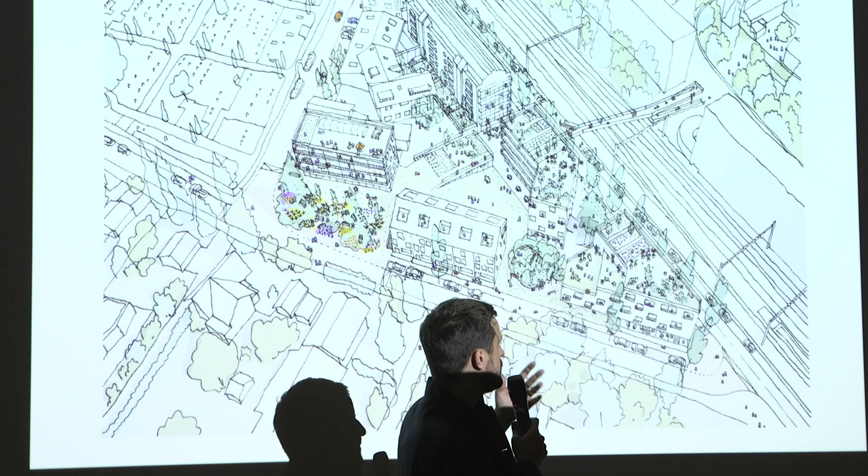This building is a building for short-term stay, so for 6 months to 3 years. Typically in Geneva, and Basel is the same, we have many people who come to the city for short mandates. They come to work at the UN, or at the university, or some corporation, and they need a place to land. So this is not housing, it's more accommodation. It's not very short term, it's mid-term. It allows you to be here in the city for a short amount of time and potentially either move on to another place in the city or move back if you're here just for a short time.

And this building is a building for young graduates from professional schools. It's also for maximum 6 years. And there's a big fab lab on the ground floor, inspired by the inventor kind of workshop that we talked about before. And this again is something that is connected to a foundation. We talked to a foundation in Geneva. There was one inhabitant of Versoix who told us that he was on the board, that it was something in high demand. We wanted to bring back young people into the neighborhood. It's a kind of an aging neighborhood.

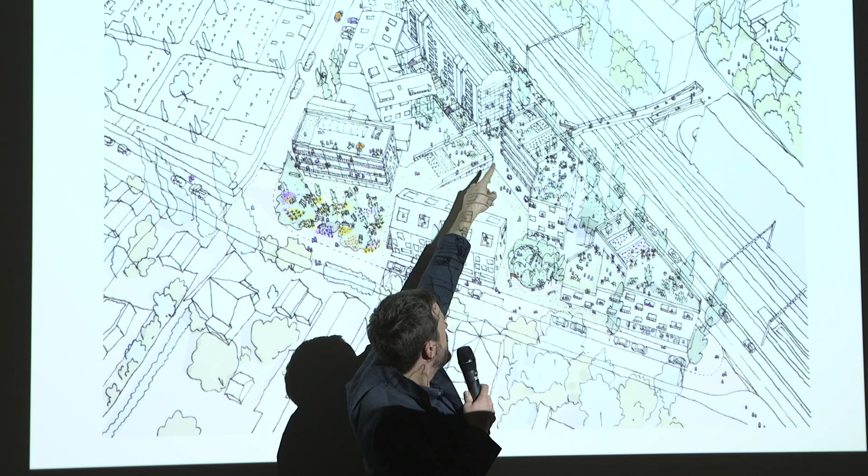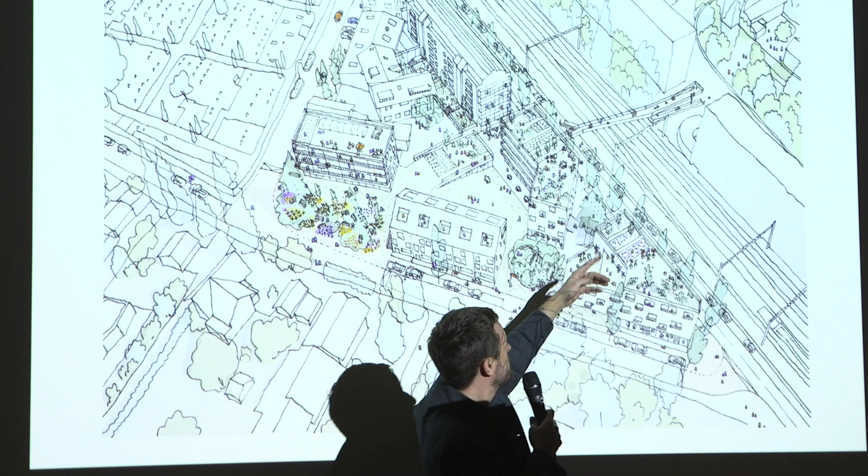And this is like an urban kind of terrace with a cafe connected to this building that we completely reopened on the ground floor, even though this building is pre-existing and we have to keep it. And then we proposed a connection between that side of the neighborhood and the other side, which again was a strong demand. This is not part of the plan as it is now, but we made sure that it could be done later on if the budget was found by the municipality.

So a few takeaways from the process. I won't explain them all, but basically in Geneva we now have, and I think it's maybe the same in Basel, a strong debate between the right to the city, the right to house the people who really need to find an affordable place to stay, and property rights. For us, resolving this equation, saying that yes, the owners need to benefit, but at the same time we need to provide more housing, and we need to do it with the owners and with the neighbors in order to make it happen, was key to the project.

To work with present residents, but also to bring into the discussion potential future residents. So it's not only driven by the neighbors, but also by people who would like to live in the neighborhood. Create places which are not only housing for people to stay forever, although we needed it in the neighborhood, but also places which are more temporary, so accommodation versus housing. And of course turn the fear of density into a desire for urbanity. We saw that this was very strong through the process because people loved using the house, coming, meeting each other. So by already enacting this moment of density, of urbanity, it was made to be something desirable.